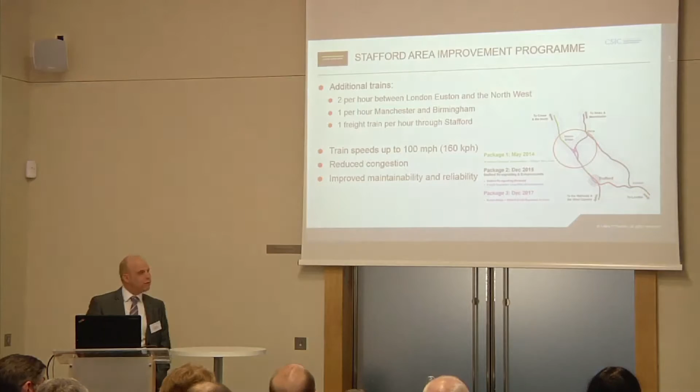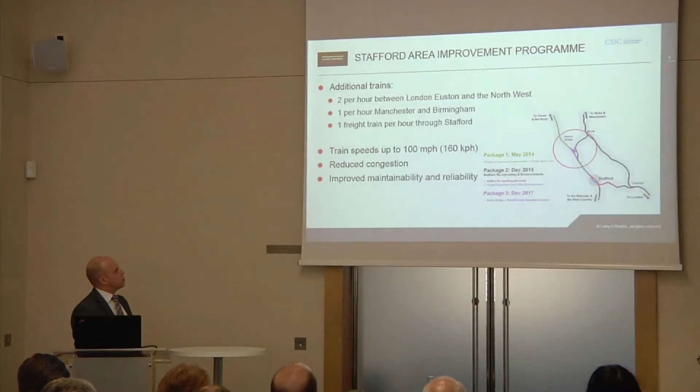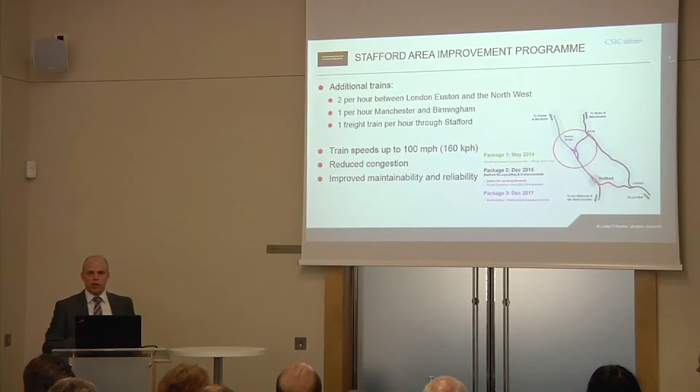I'll give you a very brief rundown of the project. It's predominantly there to improve train capacity on the West Coast Main Line, and it's split into three sub-projects. The first is LSI, line speed improvement - track and overhead line equipment amendments which increase the line speed of the slow lines up to 100 miles an hour. Package 2 is the Stafford re-signalling works, re-signalling the whole of Stafford station and connecting the signalling down to the Rugby Regional Operating Centre.

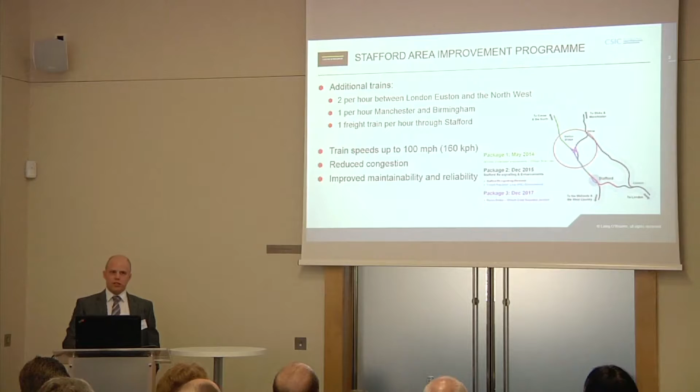Package 3 is the Norton Bridge flyover works. These are major civil engineering works to grade separate an existing life-expired junction on the West Coast Main Line. It's these works that I'm going to go through now, and it's these works that CSIC have been involved in.

Let's try again. There we go.

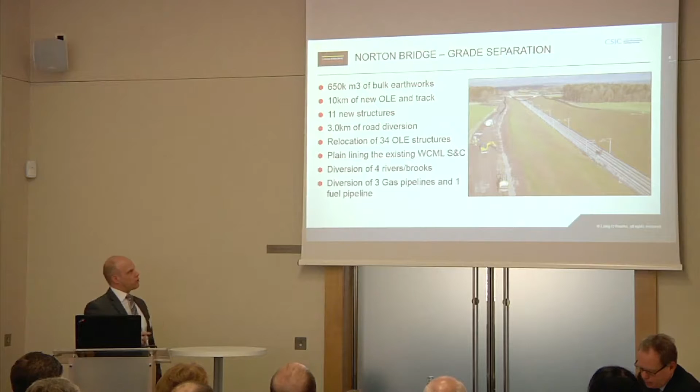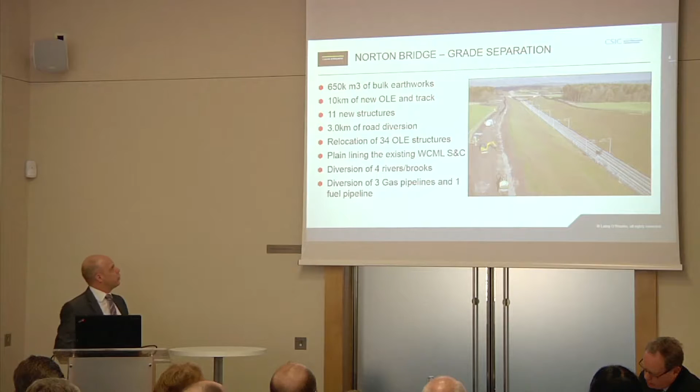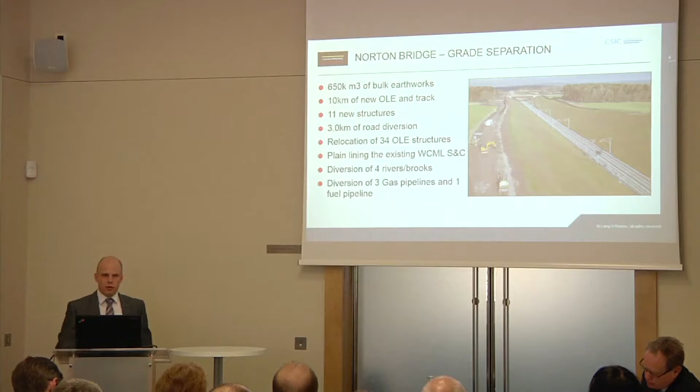Ultimately this is a broad scope for the Stafford Area Improvement Programme Norton Bridge works. It's significant civil engineering works, around £100 million, with significant earthworks, OLE works, S&C works and utilities diversions. It's predominantly greenfield, but there are some touch points onto the existing West Coast Main Line. Key to CSIC's involvement is the presence of 11 new structures on the project.

Both Laing O'Rourke and Atkins, one of the non-owner participants, had previous links with CSIC prior to our project and prior to the forming of the alliance. It was a meeting at an innovation event that led to the CSIC project linking in with the Staffordshire Alliance. CSIC were in need of a donor bridge, effectively, within which and onto which they could position fibre optic monitoring equipment with the intention of taking real-time strain measurements. The long-term goal is remote asset intelligence.

I think it's fair to say at first there was a little bit of resistance and concern over the introduction of time into the programme. But with discussion with the guys from CSIC, we could see how we could do something good and bring benefit to the project. So we chose two completely different structures on the project.

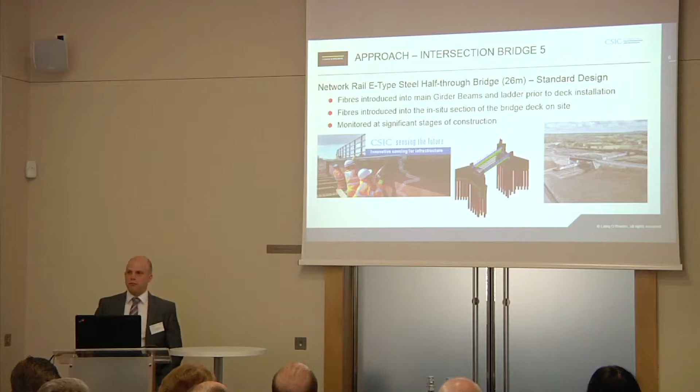The first is what we call Intersection Bridge 5. This is the crux of the whole project - us grade separating the West Coast Main Line. It's a standard Network Rail E-type steel half-through structure, fairly standard for Network Rail, something they have throughout their infrastructure in significant numbers.

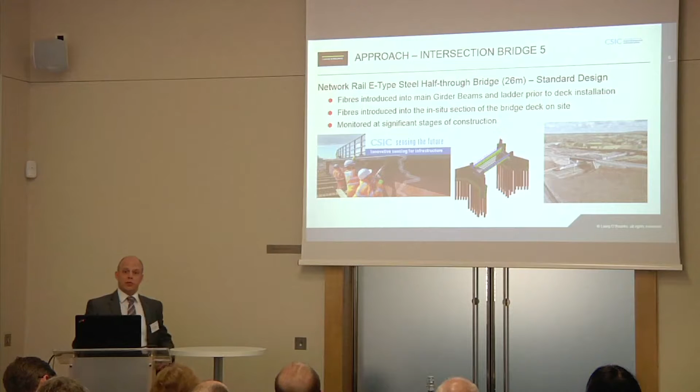We installed fibre optics into the main two girder beams, top and bottom, and into some of the additional ladder beams that span between those girder beams. We did that on the ground before we lifted that deck over the West Coast Main Line. On the far right you'll see the structure in place - the fibres were put on before it was lifted into position. We then installed additional fibres into the reinforcement on that deck so we could understand the composite action between the girder beam and the composite reinforced concrete deck.

Once these fibres were introduced, it allowed us to monitor the static and dynamic load response of the structure.

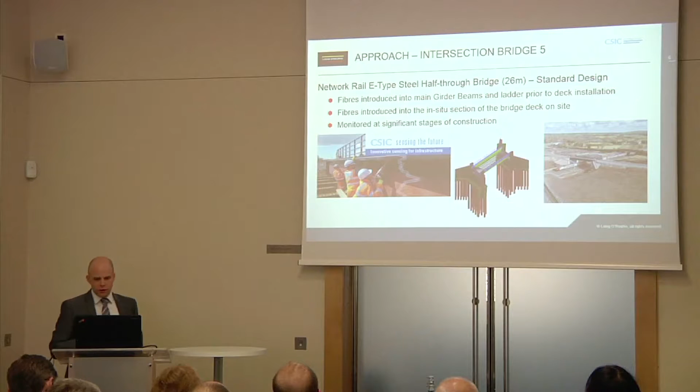The second structure was a slightly smaller structure, but a simply supported pre-stressed beam bridge, about a 10 metre span. Again, we installed fibres into the pre-stressed beams. We did this back at our manufacturing facility at Explore Manufacturing, because it kept the work away from site to a greater or lesser extent, but it also allowed us to monitor those beams during curing, during load transfer from the pre-stressing strand into the beams, and also during lifting.

Once the beams were delivered to site and installed, we then installed additional fibres into the in-situ element of that bridge deck, so that we could understand the composite action of that bridge.

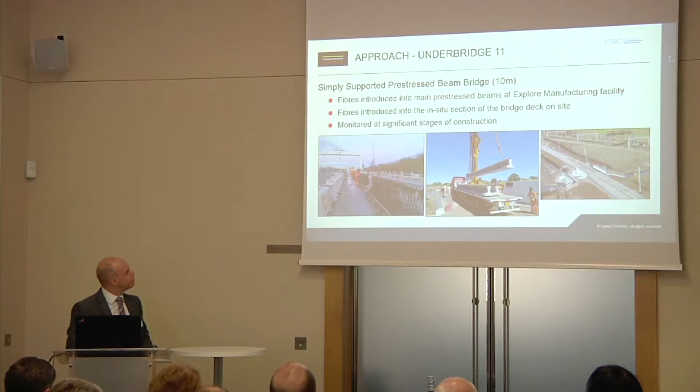So this is a picture of some of the CSIC team at work. You've got Dr. Liam Butler on the left-hand side, who's at the Explore Manufacturing Yard in the pre-stressing area, monitoring the beams, I think after the transfer stress has been introduced into the beams. And then you've got Jason Shardlow and Niamh Gibbons, two of the three, who are on Bridge 5 installing the fibre optic monitoring onto that structure. It's fair to say they worked through some pretty poor weather, and they also worked pretty feverishly to maintain our programme.

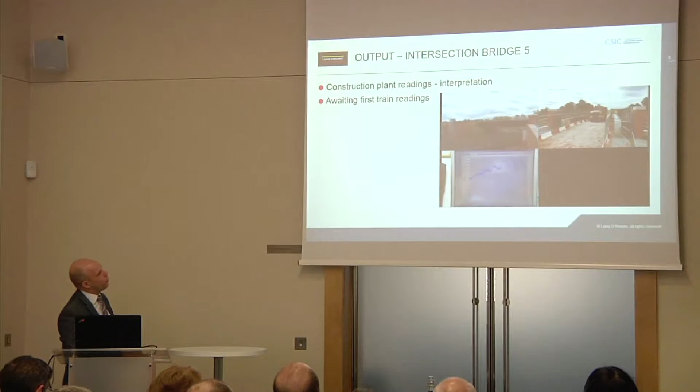So the output of this work, the monitoring data so far has been promising. Hopefully, as you can see, the system is being tested for plant loading, and this data is now being analysed and interpreted so that we can understand what it's telling us.

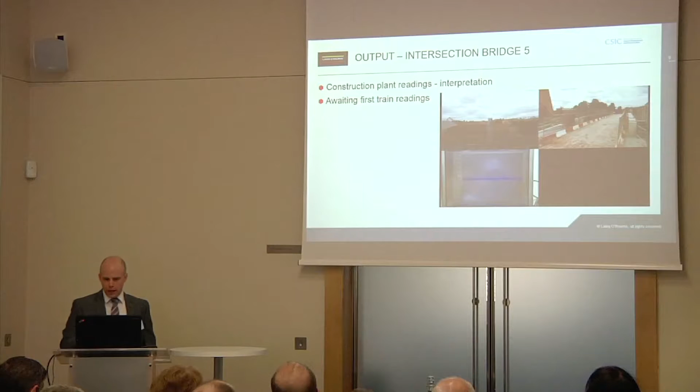Very soon we'll have the first train loading data over that structure. We're due to enter that bridge into service over the Easter bank holiday at the end of March, and we'll get some really good data from that when we get train loading, which we'll then do some more analysis on.

So Bridge 11, we've got more data from already because we introduced fibres into the beams in the yard. So it's given us some data in terms of the curing strains, and these were in line with our expectations, in line with what you would expect a normal pre-stressed beam to strain during its curing process.

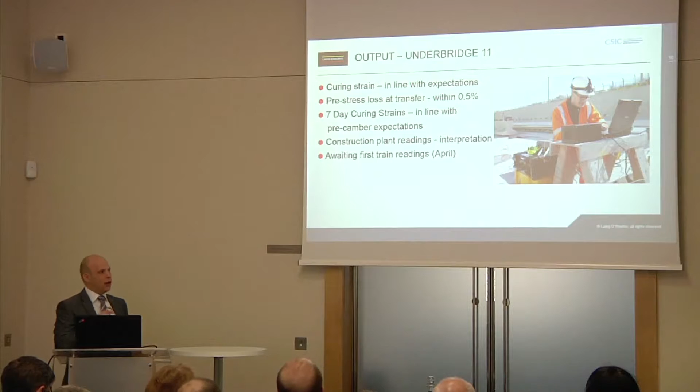Interestingly, we also monitored pre-stress losses, so when we actually chopped the strand and introduced pre-stress into the beam, they were within about 0.5% of Eurocode 2 calculations, which we were quite encouraged by. And as with Bridge 5, we've now got loadings for plant loading, and again, at Easter, we will get some train loadings.

So what's the value to Laing O'Rourke, the Alliance, and the industry? Well, it gave us, from a Laing O'Rourke perspective, certainty of the product assurance data. The manufactured components were seen to be performing as they were expected to.

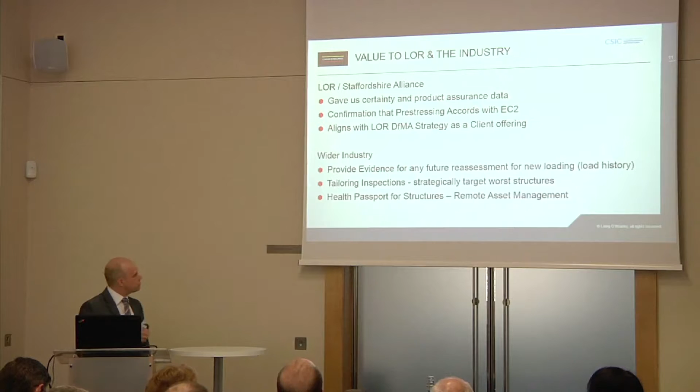The measurements of strain confirmed that the pre-stress transfer losses accorded with the Eurocode. And importantly, the addition of the monitoring equipment within the components is heavily aligned with Laing O'Rourke's design for manufacturing assembly process and procedure and strategy. We believe this monitoring to be a valuable client offering going forward in the future.

The wider industry value: the system will give us significant data to allow the structure to be reassessed against any new loading requirements. The asset owners will have the load history of the structure throughout its whole life. The structure will give Network Rail an understanding of the in-service performance of its standard design catalogue structure, so it can do a comparison as to whether they perceive that structure to be efficient or not.

It also gives the asset owner the ability to tailor their inspection and maintenance regime to target those structures that are performing the worst structurally. And eventually, it will be seen as a health passport for the structure, informing the asset owner how their structure actually does feel. Thank you.

Well, you've given us a great start. Thank you very much indeed for that. The Staffordshire Alliance Programme, I think, is such a good benchmark programme, not just this, but several things.

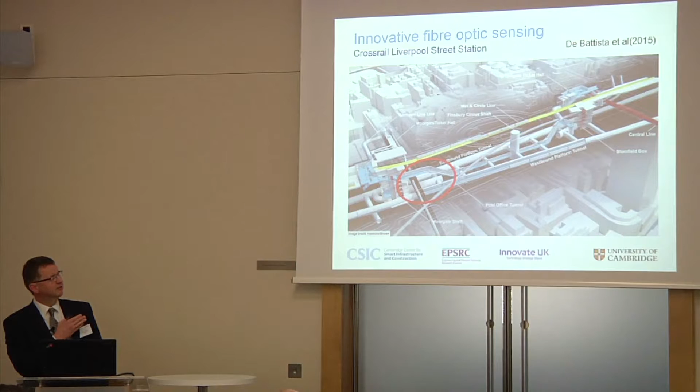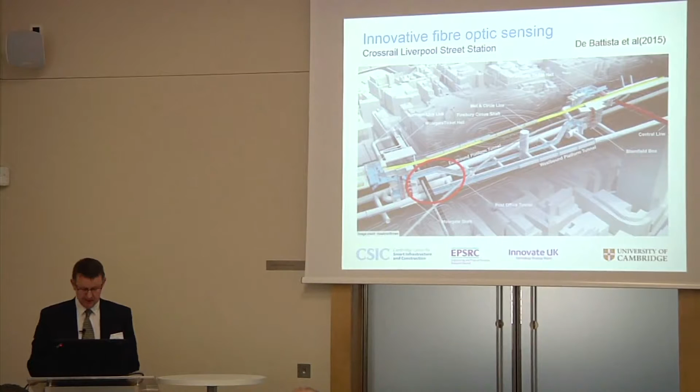So this is looking north, so the west of the station is to the left-hand side, the east of the station to the right-hand side with Broadgate. To the west we have the Moorgate shaft, and below there we have CH5, which is the subject of this presentation.

So when we look in more detail at CH5, this is effectively a big Cambridge laboratory, I think, CH5. And it's one of many laboratories that we've introduced onto Crossrail. Moorgate shaft to the left there is the deepest shaft on Crossrail.

It's been one of the most complex shafts to build because of the number of tunnels that come into it at different levels, and the significant amount of reinforcement needed around the waling beams, the construction of the diaphragm wall. It was the subject of a big value engineering exercise where we took out some of the temporary works - that's a separate two-hour presentation that I'm sure somebody will give at some point.

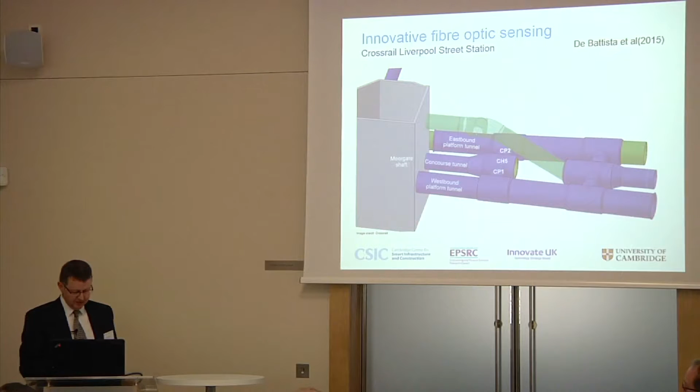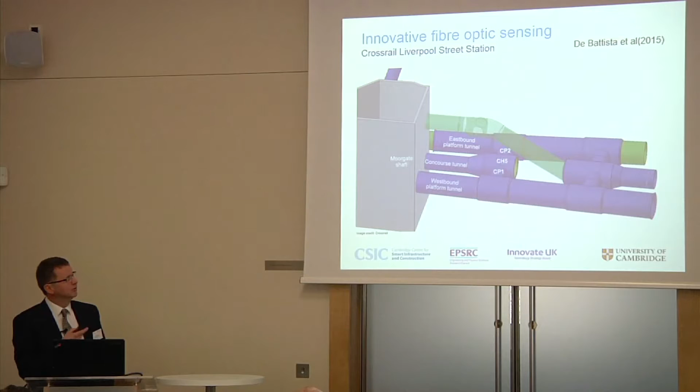But the laboratory here, as I said, is CH5. And in that, you can see the green shaded structure that runs above. CH5 and the connections into CP1, CP2 were done before we built the escalator above, for the obvious reason that you don't actively undermine something you've just created in concrete. So to prevent those ground movements from those two passages affecting the escalator barrel, everything in blue was built first.

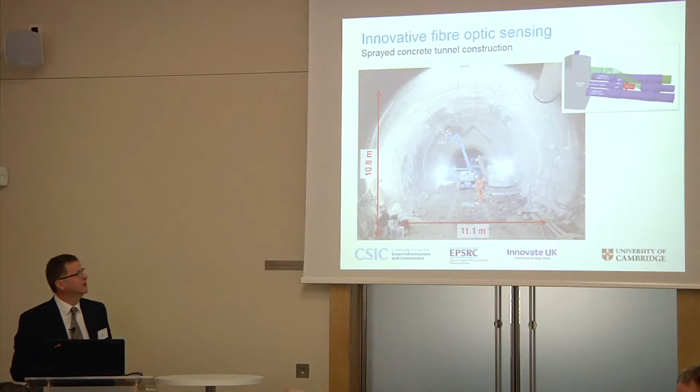So here's the view looking west. You see the arrow at the top there, and you can pick out the definition here, certainly the dimensions. In the middle of the photograph you can see two circular areas marked out almost with the cut here line on them in yellow, where you don't have the hedgehog effect with the rebar inserted into the spray concrete lining. So this is the laboratory area, and those pins there are for fixing rebar and some of our fibre optics to the wall.

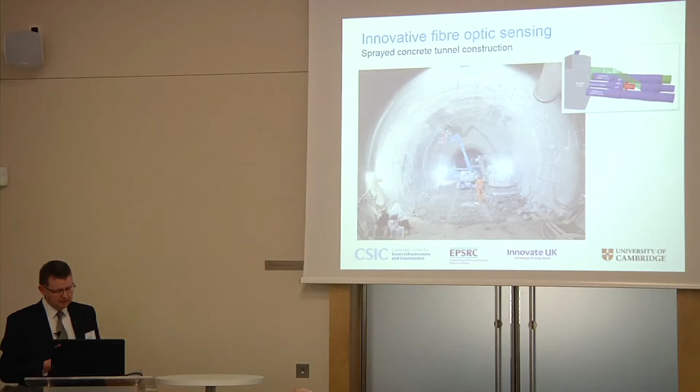These are complex analyses. They're highly non-linear in the soil properties used, and there's a time dependency associated with the curing and setting of the sprayed concrete materials. This has become a bit of an art form.

One of the things we did very early on in Crossrail was recognise that on projects like the Jubilee Line extension, as you travel around, you'll pick up some very big flat openings between the concourse tunnels and platform tunnels. Because they're big flat spans, they have very big pieces of steel in them, and to get those pieces of steel in you generally have to dismantle the sills and lintels into sections to fabricate, and they're very dangerous things to put in place. They also take a lot of temporary work, so they're pretty slow. At the start of Crossrail, we set out to try and do things differently.

So what we tried to do was create a three-dimensional structure that shed load more effectively, utilising the change in our computational power in analysing these particular problems. That's what we set out to do at the start. We've sort of forgotten about this because we've been on it for so long, but it's now something the industry has adopted and said, well, that's the way to do it. But at the start of Crossrail, it was the thing that changed the way we were going to design these underground works.

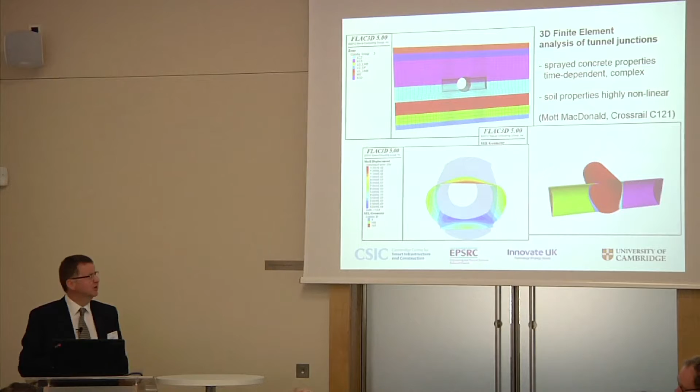So what are the additional stresses that come in? You can imagine this circular tunnel is in hoop compression, and we've got to break out the two areas in red and build the cross passages either side. As you break those out, the hoop stresses running through those red areas are shed into the structure at either side. What happens is the crown and the invert of those adits go into tension, so you get vertical cracking around the crown and invert, and overstressing of the pillars either side along the axis.

It was the collection of real data from a live breakout of that sort to validate the design assumptions and the FE models, which was really the subject of the installation of fibre optics, which Cambridge undertook.

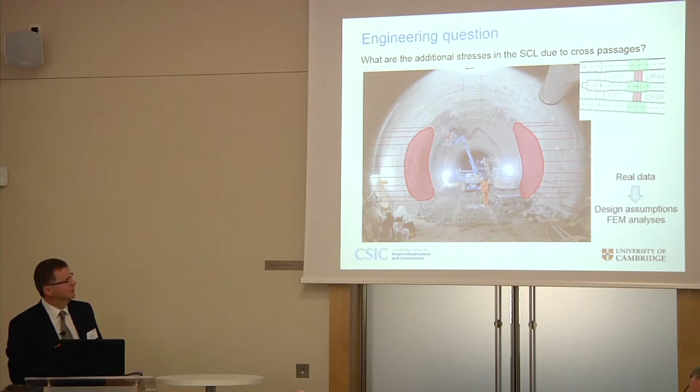The form of construction there is we adopted an over-thickening for these areas where we're going to break out, so there were 3 layers. Those 3 layers, 200 mil and 400 mil thick, are built up in separate individual layers of no more than about 100 millimetres in thickness. They then provide this thick structure which has tension reinforcement in the crown and invert that enables us to break through and create the openings.

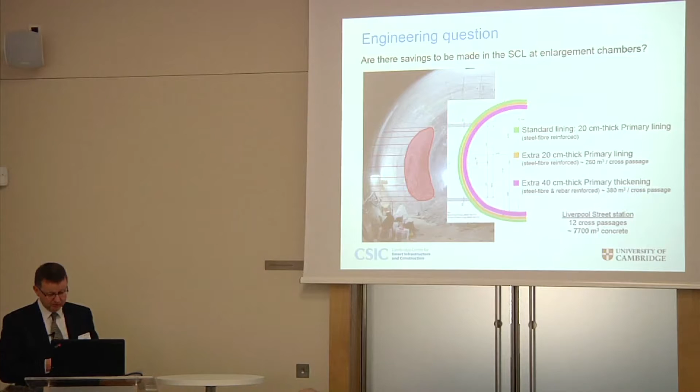Now, looking at those two examples: there are 12 on Liverpool Street and a total of 7,700 metres cubed at Liverpool Street. On Crossrail, that's multiplied by 4. On Crossrail 2, there are 11 stations, so it'll be multiplied by numerous times. So the potential saving in efficiencies in this particular piece of construction is quite enormous.

There were 210 metres of fibre optic cable installed around those opening sets to monitor the change in strain as we broke out, and also the build-up in stress as the subsequent layers were applied before we broke out.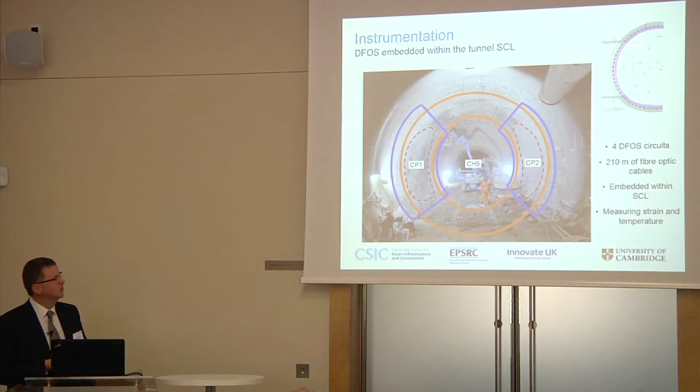And during that installation, there we go, the shot of the installation. The most important part of that installation procedure is that when you're building sprayed concrete, you have to make sure everything you're building is encapsulated correctly into the concrete, so you can't get any shadowing or edge effects around those instruments. They have to be correctly installed and installed safely, so there's quite a bit of working at height in that construction sequence. But this is an extra operation that clearly went incredibly well.

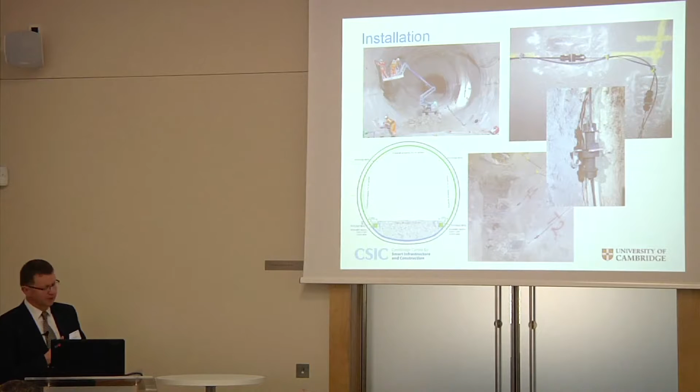So, what did it tell us?

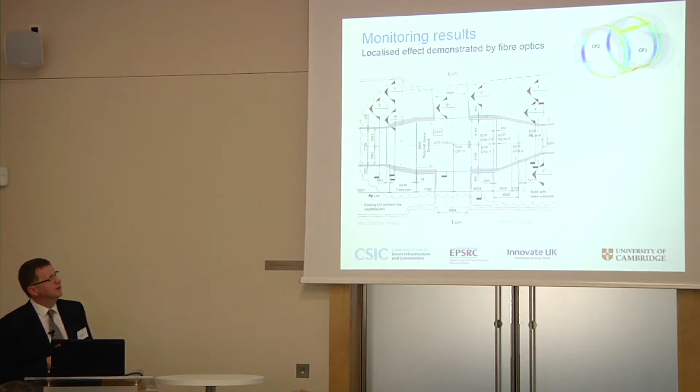The data was then post-processed, which is the graphic in the top right, which I won't try to explain. But I think the most important finding there was that those edge effects, that transfer of hoop load into the adjacent lining, only extended for about 3 metres either side of the opening.

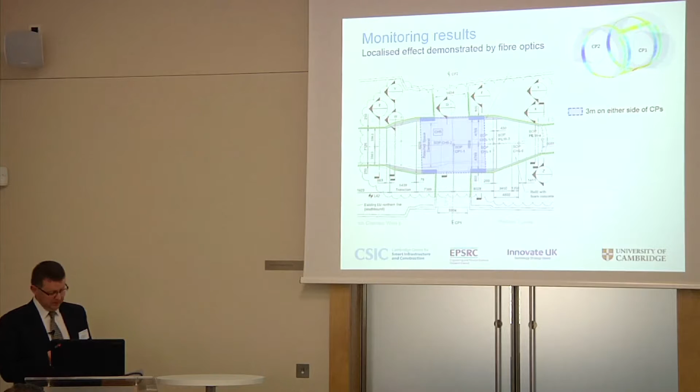This is important because the over-thickening in design was significantly more. And of course, when you look at the improvements you could make in that particular process, you see a decrease in the amount of excavated material and the volume of sprayed concrete you don't have to install. This isn't normal concrete, it's a chemical mixture rather than anything you'd recognise as concrete, and it's expensive to install underground. So any reduction in volume is welcomed, and because of the volume decrease in SCL, we have an improvement in safety in that particular activity.

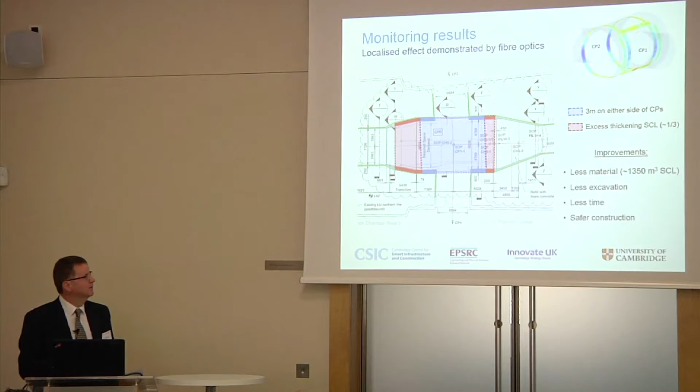There's a significant contribution, I think, in this work in improving the uncertainties in this particular process. That extra data has proven to be invaluable both now, and I know it's being used for ongoing design exercises. It will certainly be used in Crossrail 2, but it needs to be part of an embedded process of continual improvement in our design of SCL.

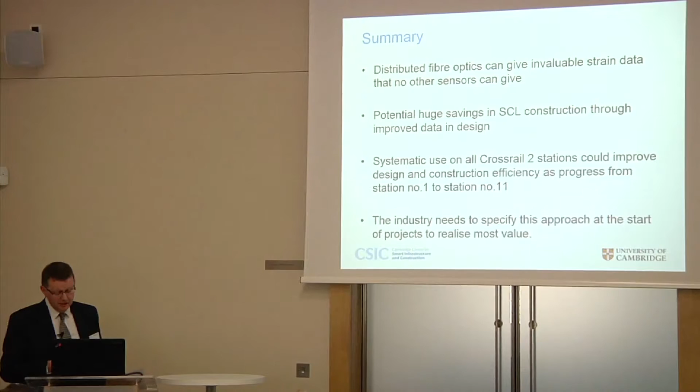I think I would have died to have the data that's now available to us when we were designing these structures 15 years ago, 20... no, let's not go there.

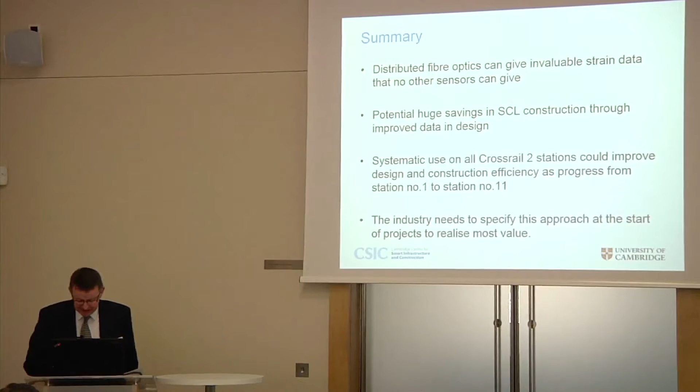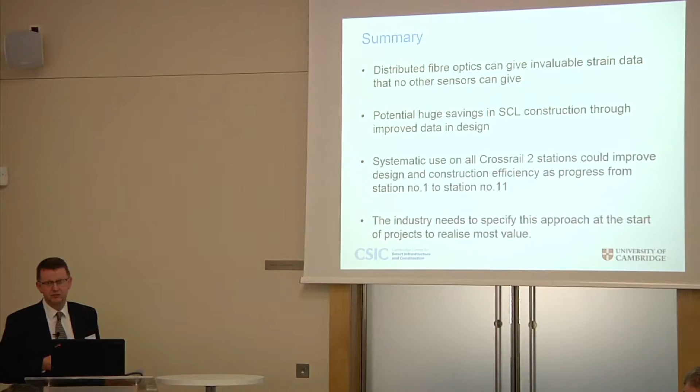So the savings are potentially very significant. And I do hope that we see this taken forward onto Crossrail 2, because as a project it could have the value from Crossrail 1 easily transported into it. I think it's up to us to specify how that is delivered now so that the next big SCL projects are able to incorporate it successfully. So that's all I have to say, so thank you very much.

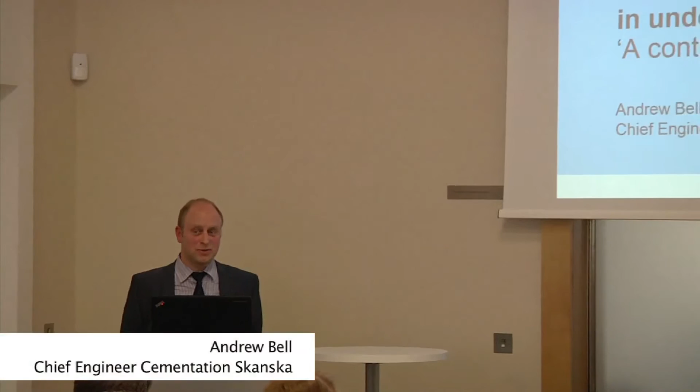Okay, yeah, good afternoon, ladies and gentlemen, and thank you for the opportunity to speak. I'm going to talk about the role of distributed sensors in underground structures, something that's very dear to my heart, very much from a contractor's perspective, because that's where I've been working for the last 5 to 10 years.

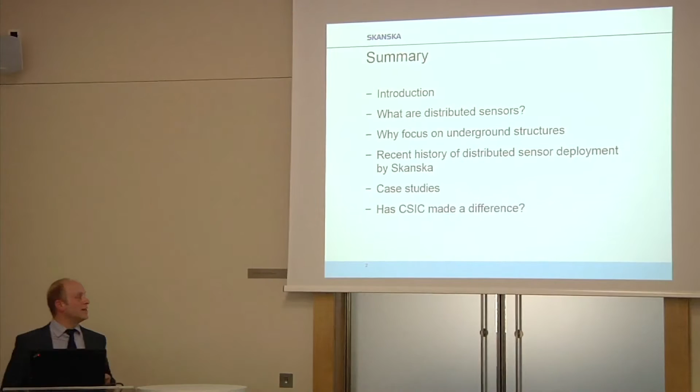I'll provide an introduction to Skanska - there's one or two in the audience that won't need that, but hopefully it will set the scene and give you an idea of why we're interested in this field. Then I'll cover what distributed sensors are, and I think some people have already talked about that. Then I'll focus on why we're interested in underground structures, then plot out some recent history. I'll cover a couple of case studies, which hopefully you'll find interesting, and I'll conclude with: has CSIC made a difference? And that will be in our view.

Introduction to Skanska. Skanska are a global business. 90% of our work is in construction. The rest is our business streams in development - residential development, commercial development, and infrastructure development. This is particularly important when we're talking about tools, smart infrastructure and innovation, because as well as being a builder, we're often developer, funder, builder, and maintainer.

So where do we work? We're global, but we're active in selective markets. This gives you an idea of where we work, the number of employees we have, and our turnover - that's around about 13 billion UK pounds.

Skanska UK was established in 2000, and again some figures there give you a feel for the size of the business. We've worked on projects such as the Gherkin, M25 widening and Crossrail, and on a number of those projects we've been able to implement and incorporate smart technology and smart processes.

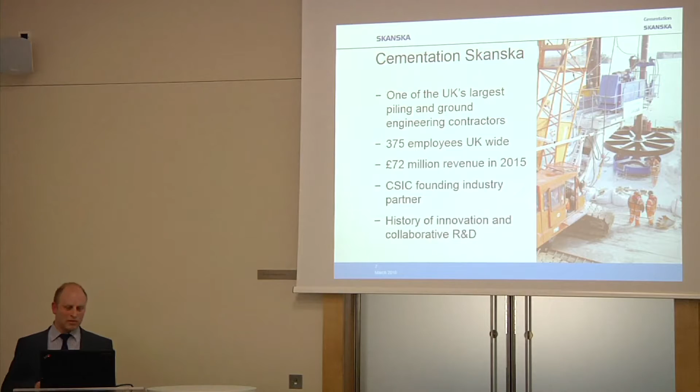So down to Cementation Skanska, where I spend most of my time and effort. We are a specialist UK-based piling and ground engineering contractor. We're one of the largest. We're also one of the CSIC founding members, so we've been here very much from the word go, and we've got a history of innovation and collaboration.

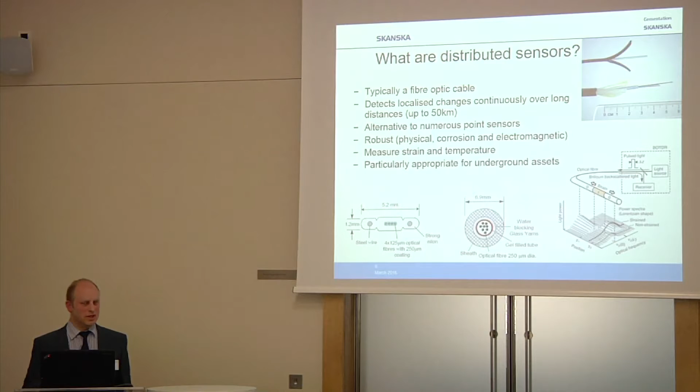So what are distributed sensors? Well, one or two of the earlier speakers have beat me to this, but we're generally talking about fibre optics - long cables that can detect changes over very long distances, and they replace often thousands of point sensors, so very useful to us as an industry. They're very robust to both physical corrosion and electromagnetic interference. They can measure two things typically, strain and temperature, and they're particularly important to underground assets, which is where my experience and expertise has been.

So why focus on underground structures? It's not just a geotechnical engineer talking about geotechnical structures. The problems on projects with the subsurface work - foundations, shafts, basements - are usually responsible for half of significant project delays. So it's an area as an industry we really need to focus on. They're very costly when things go wrong. Also, they're very difficult and often impossible to see and touch. So we're putting these things in the ground, they're supporting our infrastructure, and unlike the above ground asset, we can't get to them.

So sensors are very important in this area. Interestingly, they're nearly all unique. It's very difficult to use off-site fabrication for some of this work - some of it we can, but some of it we can't. And the environment when we're down in the ground, in tunnels or in shafts, is a high-risk environment. And there are clear safety benefits to using some smart technology, which I'll talk about in a minute.

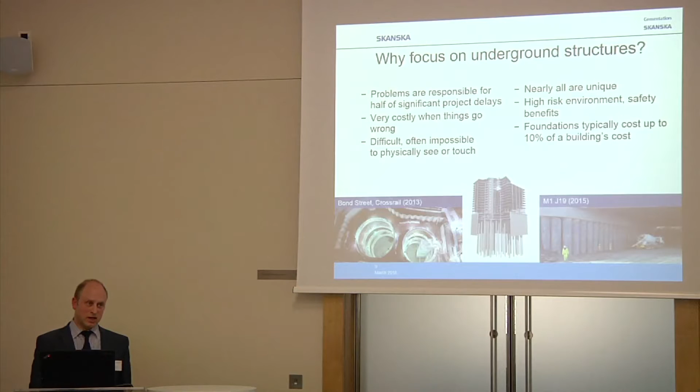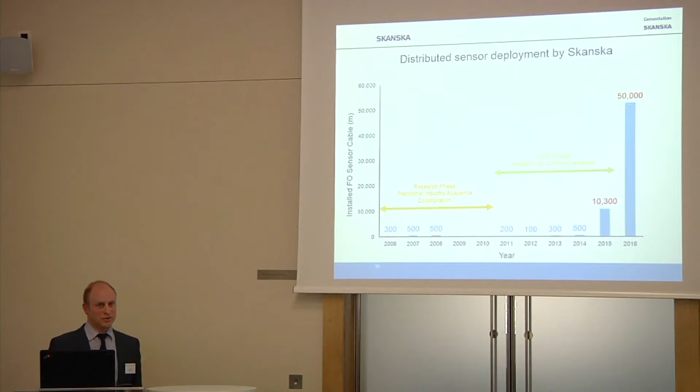And then the recession hit. Thankfully, the recession hit, but the CSIC phase started quite quickly after that. So we, in conjunction with other collaborators in CSIC, and Cambridge in particular, started looking at this in more detail with more of a plan. And you can see over the CSIC phase, whilst we had a reasonably slow start, towards the end, when we've moved towards industrialisation and commercialisation, the values have gone up. And with the values going up, the benefits have gone up as well, because the more we're putting in the ground, the more we're learning.

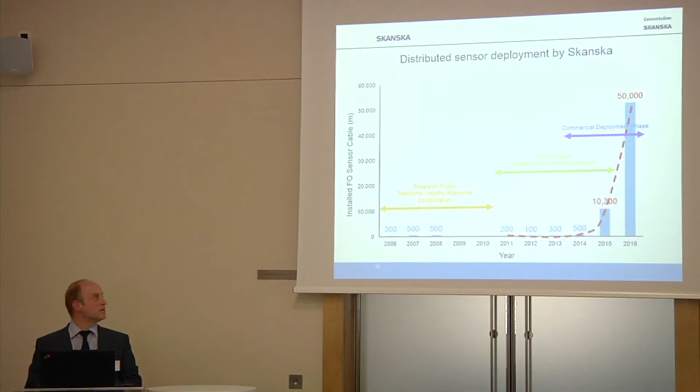So this bit at the end is what I would class as the commercial deployment stage. And the two case studies I'm going to show sit in and around the green and the blue area. You'll see there quite a stark increase in utilisation of technology.

Case study number 1. We started in 2011 a Skanska project called 6 Bevis Marks in London. There was an existing structure, you'll see on the right at the bottom there with the Gherkin in the background. It was 7 storeys high with a double basement. We replaced that with a 14-storey building, and we kept pretty much all of the existing basement and substructure.

So we successfully reused much, as you see in the graphic there - everything other than the red is existing, and that's a 3D visualisation of the substructure. The red was additional new piles we had to put in, but much of it we managed to save.

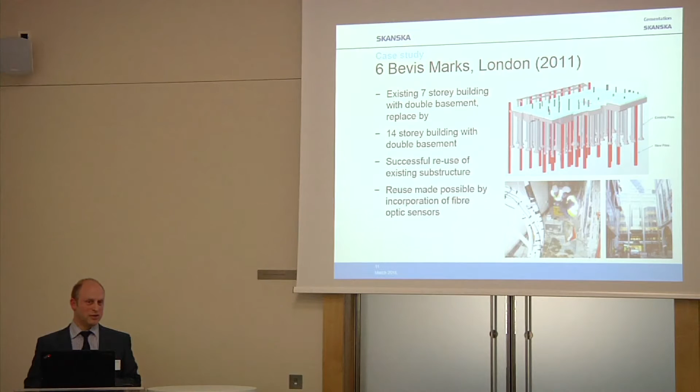The reuse was only made possible by working with Cambridge and CSIC, installing fibre optic sensors. You can see some of our colleagues from CSIC in a dusty basement putting fibre optics 20 metres into the ground, into existing underreams, to have a look at what happened to the building when we knocked it down, so we could learn for the future, and we could also validate and re-warrant the structure.

So some headline figures on Bevis Marks. Because the substructure was so massive, we managed to save 52% of the mass of the structure and retain it for reuse. We saved over 1,000 tonnes of embodied carbon, and that was just in not having to install a new substructure. There was much more than that in terms of what we didn't have to then do and bring to site. Significant cost, programme, environmental and social benefits.

Many less wagons came to the site because of what we were able to do. It was carried out, as I say, collaboratively with Cambridge and CSIC, and we won an industry award in 2013 for Best Sustainable Project, which was a great accolade.

The second case study, CemOptics. So what is CemOptics? Interestingly, it's cementation based and fibre optic based, so we pulled the two together and called it CemOptics. It's a new integrity testing method for cast-in-place underground structures. So anything we put in the ground and use wet concrete for, we can use this to assess the integrity of it. And it's been developed with and during the CSIC phase.

Lots of collaboration between us, Cambridge and Arup, who are one of our partners in this project, took place. So why did we develop it? The picture there shows current industry practice when we're installing diaphragm walls and large piles into the ground of what needs to go on to carry out integrity testing.

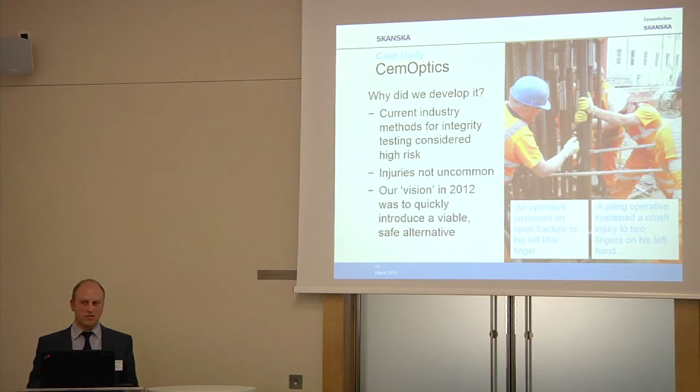It's still used now, but our vision in 2012, again with CSIC, was to quickly find a viable and safe alternative, which we've managed to do.

So at the Battersea Station box now, it's our first major commercial use of the Cementation technology. Again, this is a commercial endeavour now, but with lots of support from Cambridge and CSIC. We've installed over 10 kilometres of cable already, and it's been very successful. It's fully replaced the riskier alternative, or the industry standard, of cross-hole sonic logging.

There's been visible improvements to well-being and safety, so it's nothing like as physical. It involves a small number of people tie-wiring fibre optics onto the edge of a cage. So very easy. The benefits have been acknowledged by all stakeholders, so all those involved with the project have seen lots of benefits, from safety to speed and to quality.

And we just found out last week it's been shortlisted for 2 industry awards, for innovation and for safety. So fingers crossed.

So finally, has CSIC made a difference? There's quite a few words here, but I thought it was quite important. Certainly our view is it's enabled partners to jointly develop technology and roll out on lots of demonstration projects. So we've been able to use these lots of times. We've had a number of failures, but it hasn't really mattered because we've done it on small projects at a small level.

It's fostered and encouraged collaboration, but interestingly, we've seen lots of shared recognition - lots of publicity and PR around the importance of it, and shared recognition for all. And CSIC have provided industry-level training on technology that they understood, but we didn't, to be honest.

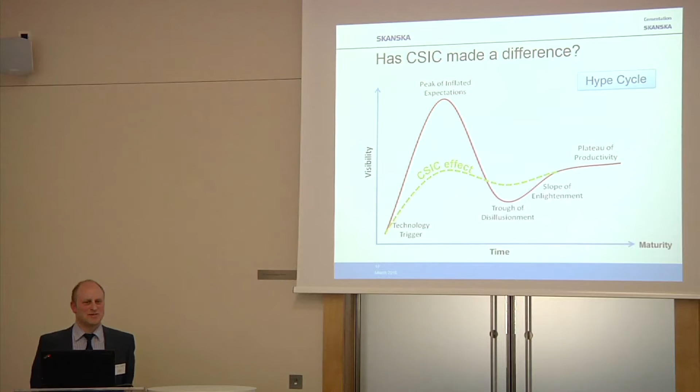If we look at a typical hype curve and hype cycle, some of you may have seen these - this is the Gartner hype cycle, often used to track technology from its inception over to a plateau of productivity. You'll see there's a peak of inflated expectation and a trough of disillusionment, which we've seen many times over the years. What we've seen with our work with CSIC, I've called it the CSIC effect, but it's a smoothing - in that last 5 years we've seen much less of a peak and much less of a trough.

So has CSIC made a difference in our view? Yes.

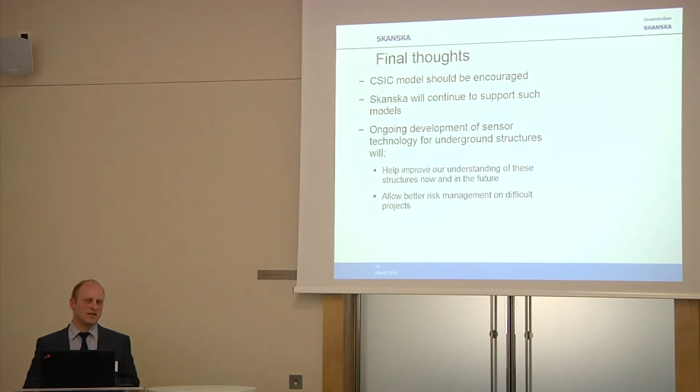Finally from me, a quote I've used many times - probably the most famous quote on sustainable development, which I think fits in very well with the whole smart infrastructure agenda: that we meet the needs of the present without compromising the ability of future generations to meet their own needs. Thank you for listening.

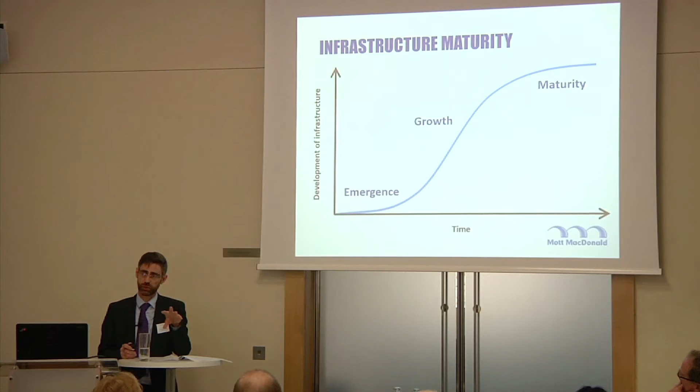But then there's the third phase, the mature phase. And I think we can define the maturity phase of infrastructure, which is where there's a lot more infrastructure that has already been built than is built each year.

And as an example, I'd call on the water sector, which is my own sector. And so we see in the water sector, there's £350 billion worth of constructed assets at the moment in the UK, and each year we add to it 1.8 billion. And so we see that there's a big throbbing machine of infrastructure in water, and each year we add a little bit.

So this is not to say that infrastructure in development is not important, but it is to say that infrastructure in use is very important too. And I think quite often it doesn't get the same kind of billing.

And a key thing when it comes to digital transformation is that it applies to both, not just delivery, but also the infrastructure in use. And so that will be a key theme which I keep coming back to.

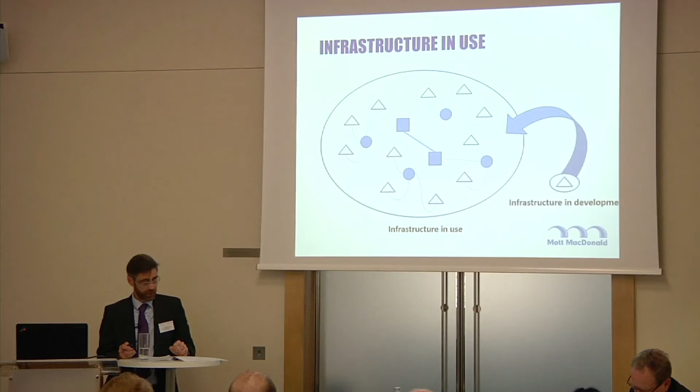And so if we accept that, then maybe there is a time, the time is now, for a shift in thinking. Because as we shift from the growth phase to the mature phase, we have to change because the situation has changed. And I won't run through this laboriously, but there are just a few of these differences I'd like to highlight.

So crucially, in the growth phase, the focus would be on asset creation, but in the mature phase, it would be on asset management. A really key one, I think, is to do with the outcomes for customers, which is really where the customer ends up being recognised as boss.

This is the ultimate customer, the user, the taxpayer, the voter. And what becomes more important is the outcome for that customer. So the starting point is the customer, rather than just going for outputs.

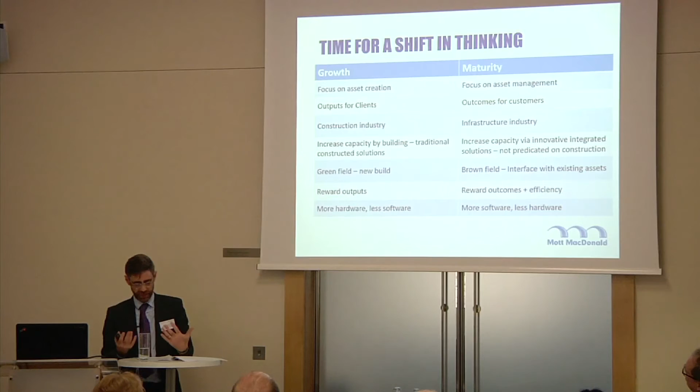You might say that in this context, what's important is the whole infrastructure industry rather than just the construction industry. We see more brownfield rather than greenfield, and potentially procurement should be rewarding outcomes and efficiency rather than outputs. The one relevant to today's talk is more software, less hardware. I think there's a key shift we need to get our heads around.

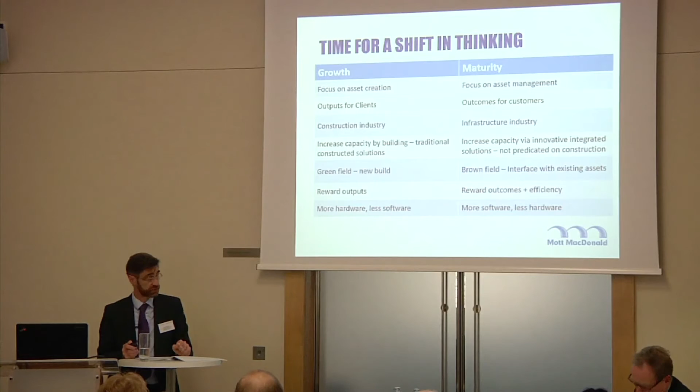But maybe one of the most important shifts is an updated definition of what value is. I'd suggest that in this new paradigm of mature infrastructure, value should really be defined as the outcome per whole life pound for the ultimate customer, rather than just the constructed output per capex pound.

If we accept this, it points towards digital solutions which are not predicated on construction. So all of this means that infrastructure is ripe for transformation.

I think we can see that transformation coming to infrastructure in a number of different ways. This afternoon I'm not talking about transformation in delivery, and I'm not talking about transformation in integration - those are both interesting subjects, but not for now. The one I want to focus on is the transformation in information management.

If we look at transformation in information management, a good starting point is to recognise that infrastructure is an information-driven industry. Really, it always has been - we just haven't fully recognised it. So one of the things we need to be doing is to call it out and then do it on purpose.

We need to recognise that information is a strategic resource, recognise it as such, and deal with it accordingly.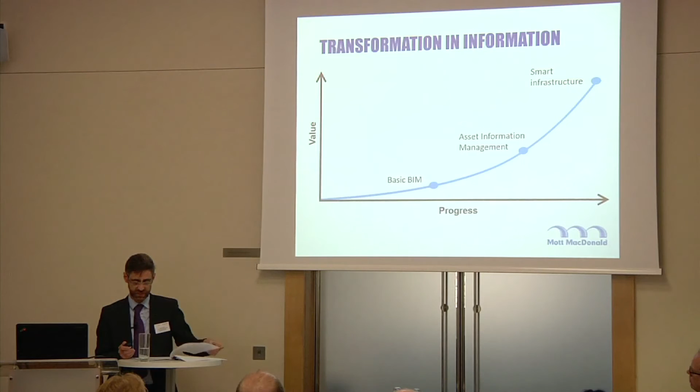So we need some kind of definition, because there's a lot of words going around the place - digital, smart, what does it all mean? I'd like to offer a very simple definition that I hope will help.

What we can see very clearly is that there's a physical world you're all familiar with, where there's physical assets and physical infrastructure. But also we've become more aware of the digital world, with digital assets and digital infrastructure. If we join those together, it's where the digital overlays onto the physical that we get smart. That's a really nice and easy way to consider this. Now that overlay elsewhere does get called things like the cyber physical system, but smart is a lot easier.

Coming out of Davos, there was quite a lot of talk about Industry 4.0. The Germans were making a lot about the fourth industrial revolution, and what they were focusing on was exactly this, but principally looking at manufacturing, which I guess is natural for the Germans. What we're talking about here is exactly the same thing, but for infrastructure.

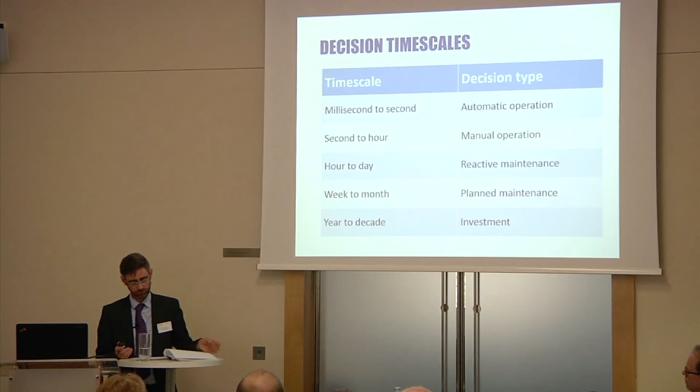So briefly then, the value proposition. I kind of touched on it already, which is saying that if we connect this up properly, then what it does lead to is better decisions faster and cheaper. And that is what leads to improved outcomes per whole life pound for the ultimate customer.

I think there's another way of looking at this which is quite interesting, which is to say that if we're just doing physical enhancements to infrastructure, then the proportion of value added is just in proportion to whatever we've added, which sounds like a truism. Whereas with smart infrastructure, we have the opportunity to add value across the whole of infrastructure via the overlay. And so potentially we can add more value more cheaply through smart infrastructure.